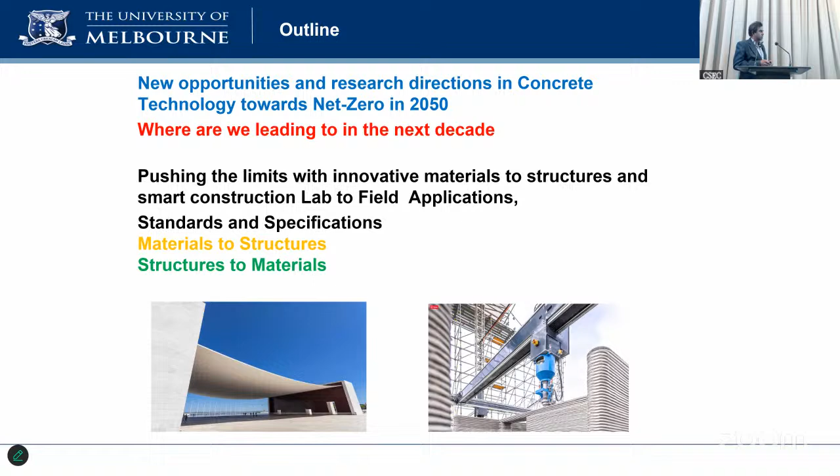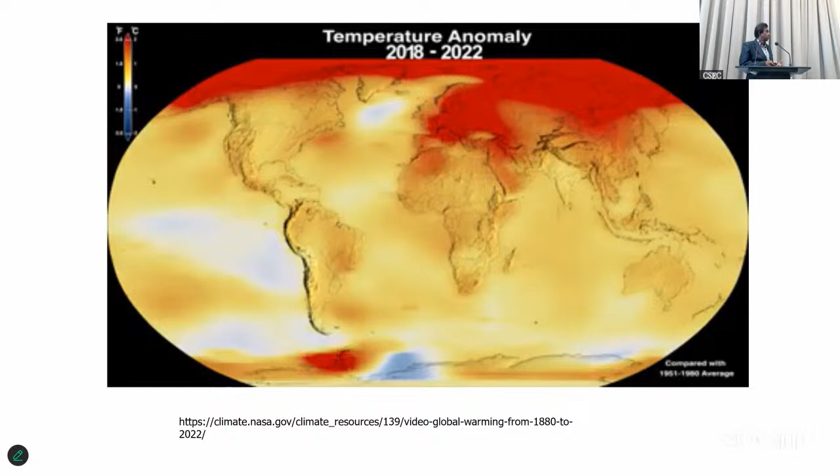So net zero concrete to start with, why we are doing that. The construction industry uses about 1/3 of the emissions of the world, and half of those come from two materials, steel and concrete. We use 0.5 ton of cement per year for every person alive in the world. I don't know how many people know that we are using half a ton of cement each. So when you look at the numbers, it's a huge consumption of cement and concrete.

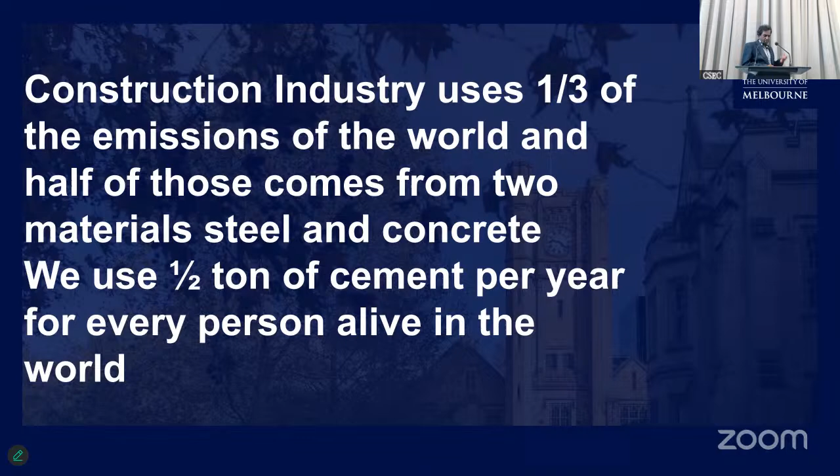Probably that's why we all are here in concrete, maybe one of the reasons. Because it is the second most popular material after water. So how can we reduce or remove carbon emissions? We really need to do this. So there are a few options we have.

We can use less cement. Today I'm not going to talk too much about optimization of structural elements. We can optimize the section. That's why a company like CSEC is always doing optimization of the structural elements, to get the best out of the materials. So really we can reduce the sizes, we can do all sorts of things there. Then increasing the recycling rate.

Again, recycled concrete is key: we demolish the concrete and then we can reuse the material. Once you demolish the concrete, we can really go and reuse the materials. So that's the second one. And the third one is geopolymers. I'll just touch on geopolymers.

Geopolymer concrete came so many years back. However, it took so long, about 20 years. Maybe I'll mention that when I talk about geopolymer very briefly today. I have limited time, but in the discussion there could be other questions. The fourth one is reducing the clinker content in concrete by using supplementary cementitious materials.

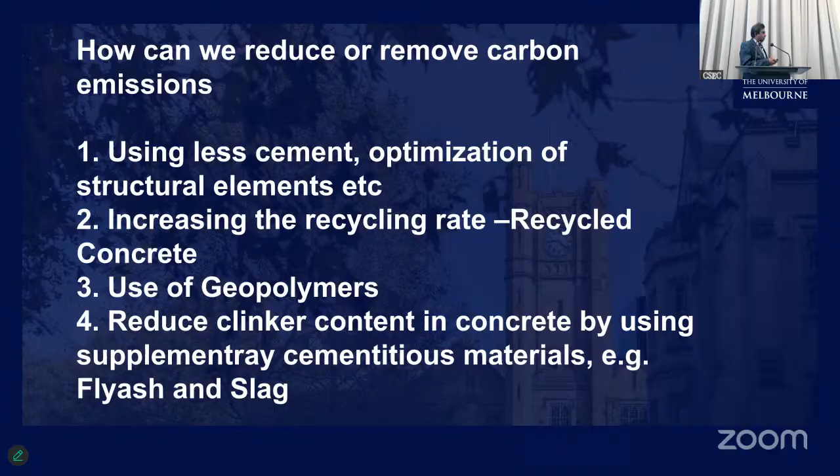I'll explain that. To get to net zero concrete: we already have got low carbon concrete, but to get to net zero concrete we have a long way to go. So as engineers and those involved in the industry, we need not be just engineers. We need to be part of the whole net zero system. That is why we are all here today, to listen to me.

We start with the basics. This is what I used so many years back to teach students. I still do a couple of lectures on concrete technology at the beginning. As a senior person, I still like to do that.

I don't teach the whole course now, but if you go back to the basics, we need to get to net zero. The only way is we need to get back to the basics.

So the concrete volume, the 70% filler, these are rough numbers. This can change, but it's very important that you have a feel for the numbers. The concrete volume is 70% filler and 30% paste.

So what we do is, only 10% of the concrete consists of Portland cement, about 20% is water, and then to reduce the cost, we fill with aggregates and all that. So it's like a glue, paste is like a glue.

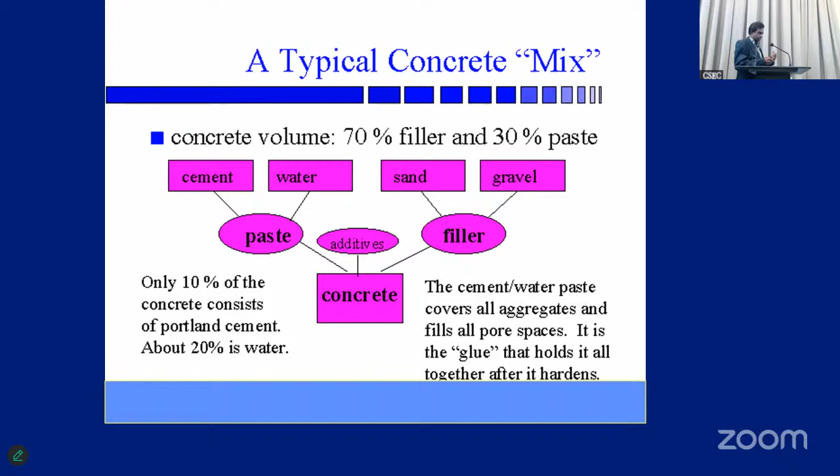So this is going back to the fundamentals. To really have proper designing of mixes and many other things, we need to really get back to the fundamentals. Then comes the cement paste, then we have the superplasticizers.

I think there are superplasticizer companies here representing the companies.

There are superplasticizers. We made a change to the world of concrete, where we could go down on water, reduce the water-cement ratio, and have the superplasticizers to improve the workability. So that's a key area that happened in the world, the invention of superplasticizers.

The concrete invention happened a couple of centuries back, but in the last century, one of the best inventions was the superplasticizers to improve workability. It's a growing area, and I can talk for hours on superplasticizers, but I will not do that today.

And then silica fume, and then the other pozzolanic admixtures came to the world with waste materials being converted. We didn't know what was silica fume or fly ash. I've been in the industry for so long, I know the beginnings of the fly ashes.

I have to mention the whole world has thanked Professor Malhotra, who brought fly ash to the world through evidence-based work from Canada, CanMet. As a young academic, I had a chance to go to Canada CanMet conferences and met Professor Malhotra.

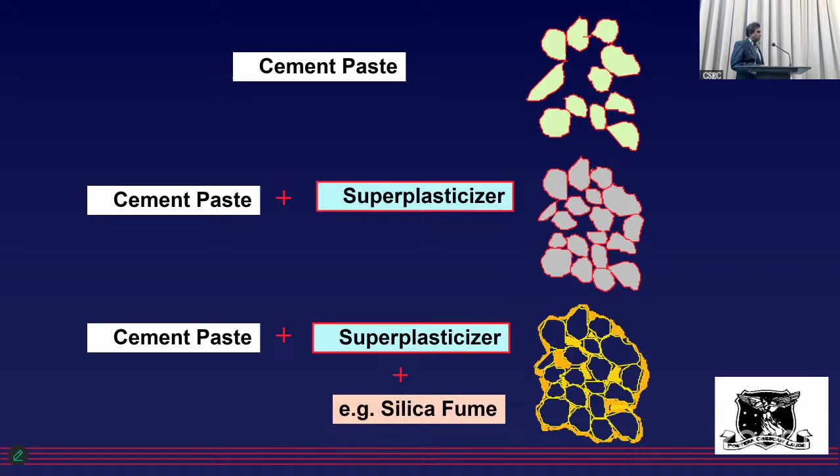So coming back, this is a graph that I use, and getting back to the fundamentals, that's where we are. We have to really get to net zero. We can't just touch on what is happening in practice. So on the y-axis, for the young engineers here and others in the construction industry, this is where we should start.

The surface area is on the y-axis and particle size on the x-axis, showing the evolution of concrete. We started with large particle sizes on the right, then coming to the left, natural sands, Portland cements, fines, and then fly ashes came later. The particle sizes were lower, but we were increasing the specific area, the particles becoming smaller and smaller.

Then you see the performance improves, and we get to conventional concrete on the right, and high strength, high performance concrete came to the world, and some of us were there from the beginning of that journey.

So coming to silica fumes, metakaolin meaning clay, which I'll have a few slides on later, and then the nano-engineered concrete, where we have nanosilicas and all that.

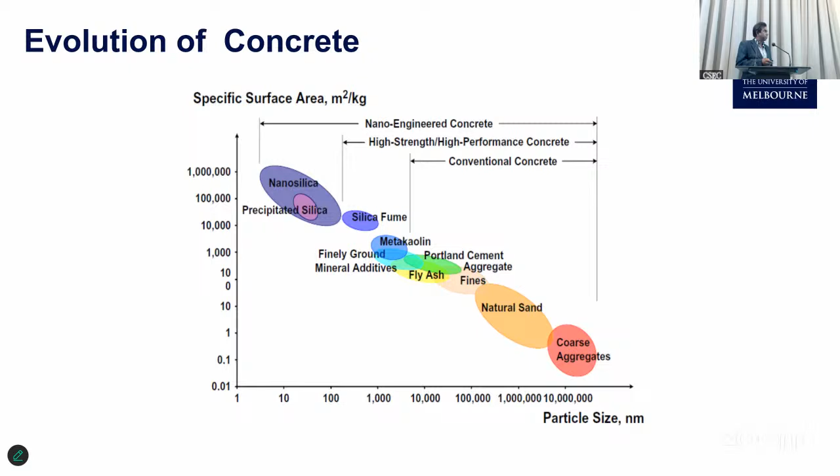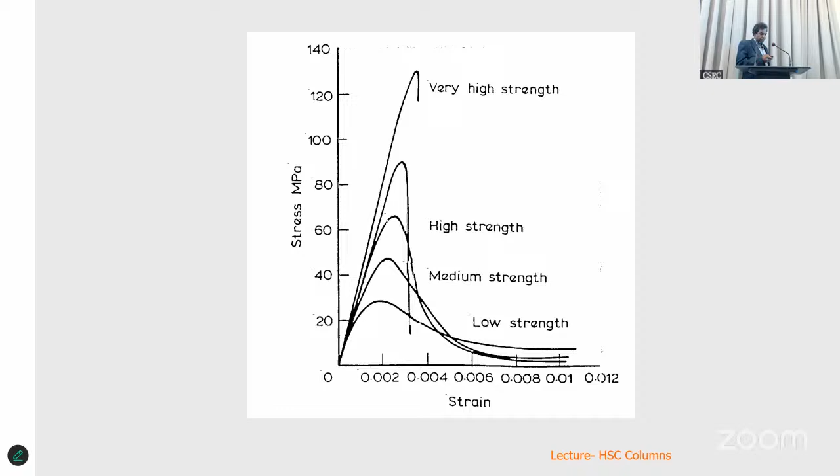That one is for another day, that talk. I will not go into it unless there's questions on the discussion. They're all here if you want. I think this book I wrote in the early 2000s, so it's all in there.

So we need to look at, I'll talk about the materials side more. Today the talk is more on the technology and the materials, but so it's the high performance materials for the future. And so we need to look at the performance side.

We need to start from the performance. It's in the lightweight. And I know, Mr. Tilak, your module had to be lightweight, the high strength, get into the high strength. The fire resistance is a key.

So we can do whatever with the materials. And actually, Sri Lanka's expert in fire resistance is here, Mr. Vajra, Aero Solutions. They're doing lots of work on trying to protect the structures from fire.

The high strength, durability is a key where the durability has to be looked at. The affordability, and it has to be affordable.

We can't just go and do everything just because we want to get net zero concrete. We can't spend millions and millions. Then it's not going to go to the actual structure. So we need to be affordable, environmental friendly. That's what we are doing now.

So you need to look at the performance overall when you look at the material as well. Acoustics and all that are secondary, but very important. Sound barriers and all that are so important.

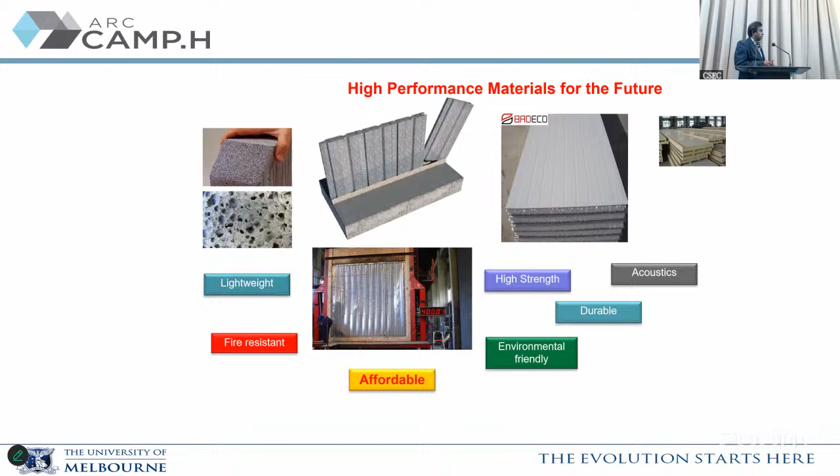So what we had to do is really use the zero carbon or low carbon materials. And we need to really get into the practices. Only way is the evidence-based field applications. We need to look at the field and collect the evidence now. So we have to start working on putting something here.

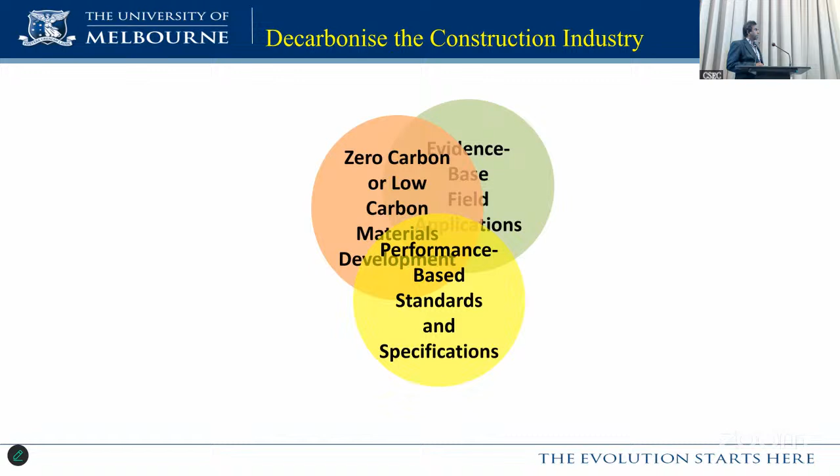And again, to really reduce to the critical period, let's not worry too much about everything there, but look at, we need to get to net zero in 2050. So we are already in 2025, and I think we have only 25 years. And even by 2030, we thought we should get somewhere.

But I will not touch on the UN SDGs and all that today, but we are really behind. And even 1.5 degrees is not going to happen. We are going to have at least 2 degrees in 2050. So we are behind on everything. So that's why we need to get solutions very quickly. So it's a critical period for change.

I think I need to put that arrow now a bit more further. I don't think we'll achieve that by 2035. This one I think was done in 2020. So we said we have 15 years of critical time, but not much has happened in the last 5 years actually.

When you think of yes and no, people are doing a lot of work, but in terms of progressing totally to net zero, we should have had net zero concrete by now in a big way. We don't have that yet. So we have to really keep working.

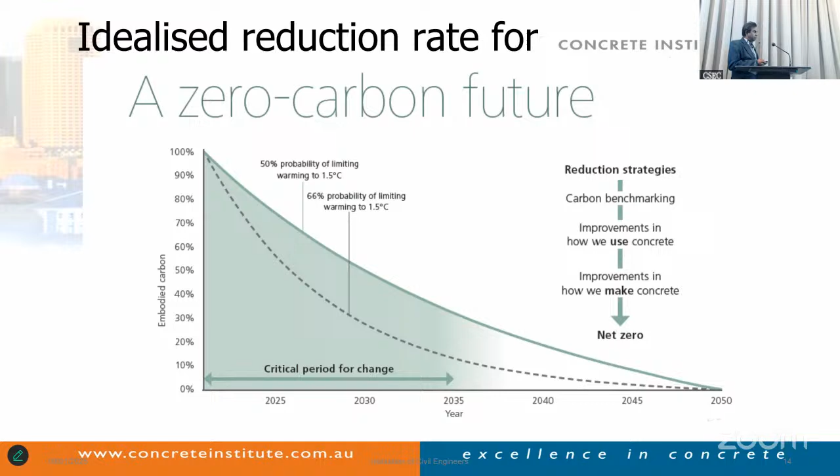So this really, no need to read too much, just to show that after water, concrete is the most consumed substance in the world. It produces 3 billion tons of emissions. And concrete itself, huge number, 8% or more from concrete itself. So 1 ton of cement emits 1 ton of CO2.

And then concrete is 0.9. Now, we need to know these numbers. Finally, it will be a numbers game in the future.

Right now we assess any project only through cost. But in the future, it's already happening in countries - Australia is happening, and Singapore is going to go even further. Europe has always been doing this - you need to show the carbon numbers for a project. We can't just say the cost is this for a project, so we need to inform. That's what we're doing here too, informing carbon numbers.

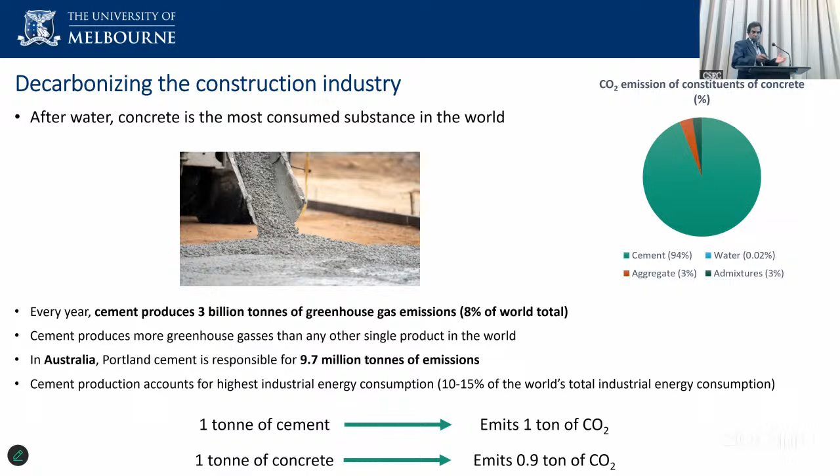So just for those who don't know why concrete is the problem - some of you may know this already, but this is the problem.

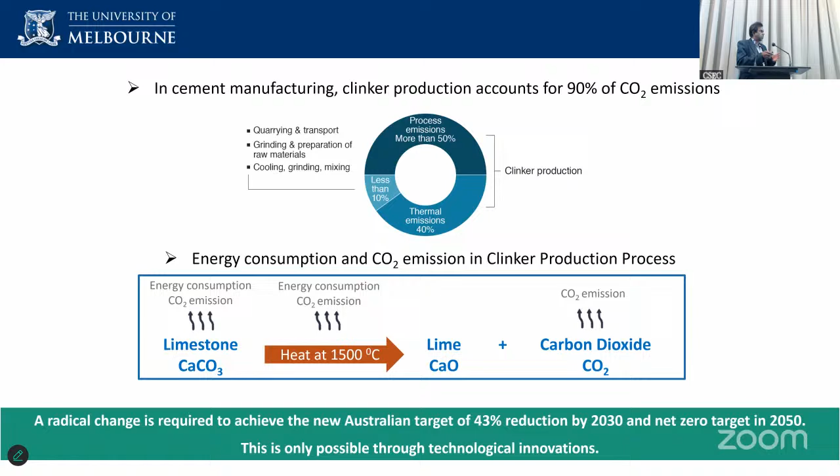We have limestone - I'll show you the next slide. In the actual process, limestone, calcium carbonate, is used for cement production. It's heated to about 1500 degrees to convert it to lime, which is the key ingredient of concrete. Carbon dioxide emissions come from that process. So we really need to do something and attack at that level - we need to do something about that. This is a basic diagram of cement manufacturing.

In cement manufacturing, clay and limestone are mixed - calcium carbonate - and it goes through a raw mill, then through a rotary kiln, and you get what's called clinker. In the rotary kiln it's heated first to 900 and then to 1500 degrees, and that's where all the carbon dioxide is released. So we need to attack at that level to really do something. Gypsum is added, and other chemicals are produced - it's really a combination like this.

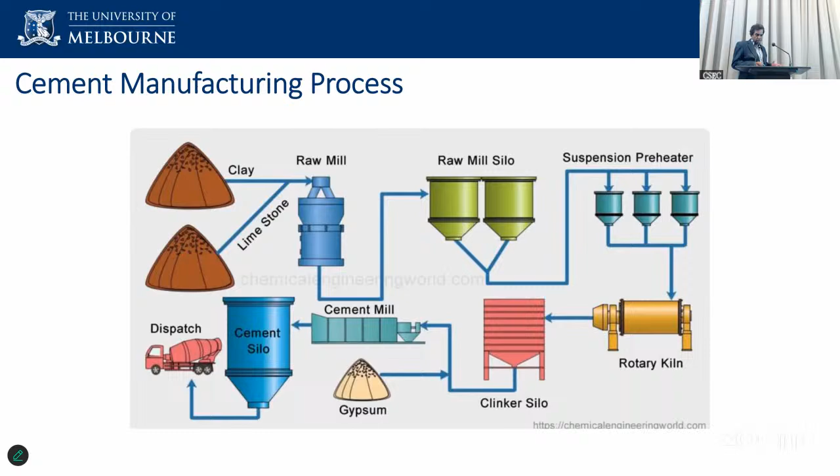So that's calcination. Now what's happening in the world? It's just starting to happen - even companies are now in the process. I told you calcium carbonate is involved, but carbon dioxide is captured - the carbon dioxide is captured, and the first process is capturing it like that.

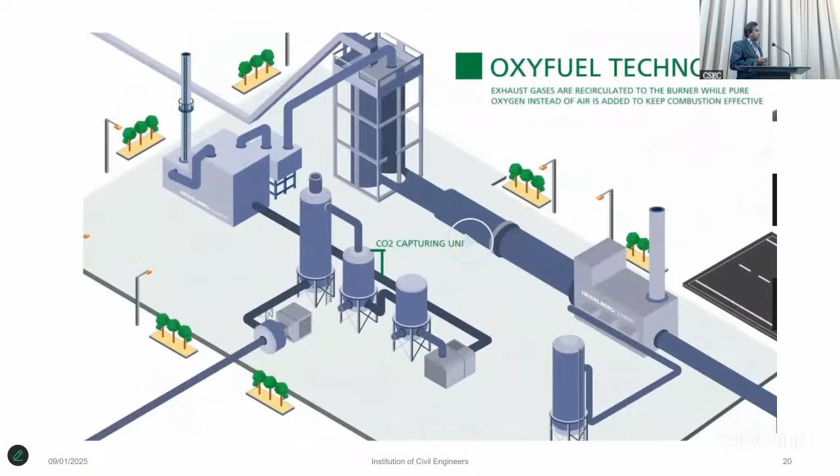So coming back to that - the low carbon concrete. I'm not going to talk about theory so much, I'm happy to answer questions and communicate about the technology, going deeper into this. This is what our team specializes in here. From low carbon concrete, the next step is zero carbon concrete - we have to be really definite and clear about this.

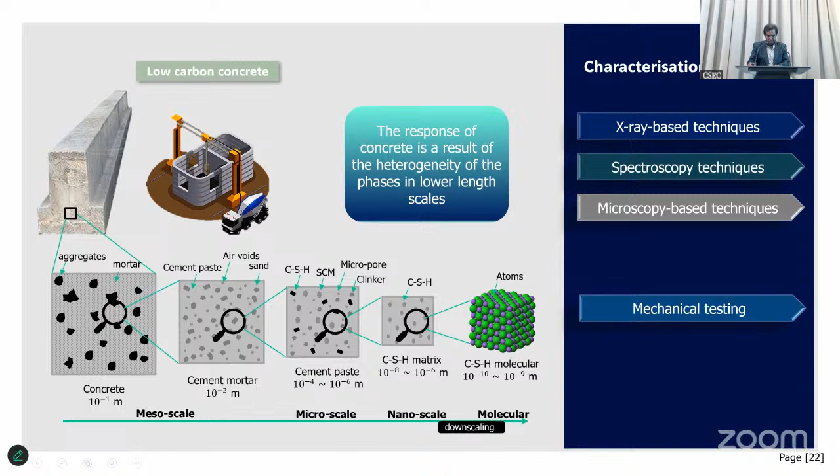First of all, there are a lot of experts in this area, like characterization technique. We're also saying this is something no other place in the world can do - using good technology and structural expertise to the best. So that's the term I can use for this very short problem. There are very good technology groups in the world, and very good structural groups, but I don't think that's enough - there are experts on both sides.

On the right-hand side, you see characterization is quite important - X-ray-based testing, and there are other ways of doing it, like microscope-based technique, EDS. We work from the nano level - we have the nano scale, micro scale, and each scale then gets visible.

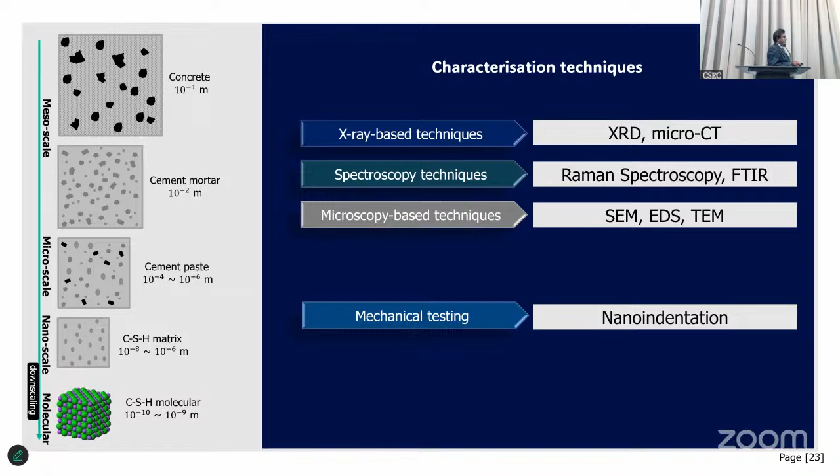Yeah, sure, that's fine. So then again, what we're doing is characterization. We do the material and we link it to the structural with what is called a new technique, nano indentation. I think Anuradha is here, one of my best PhD students, who has completed. I'm sure she's listening today. So she's working from materials to the structural level with the nano indentation. So we have done some world-class work with that.

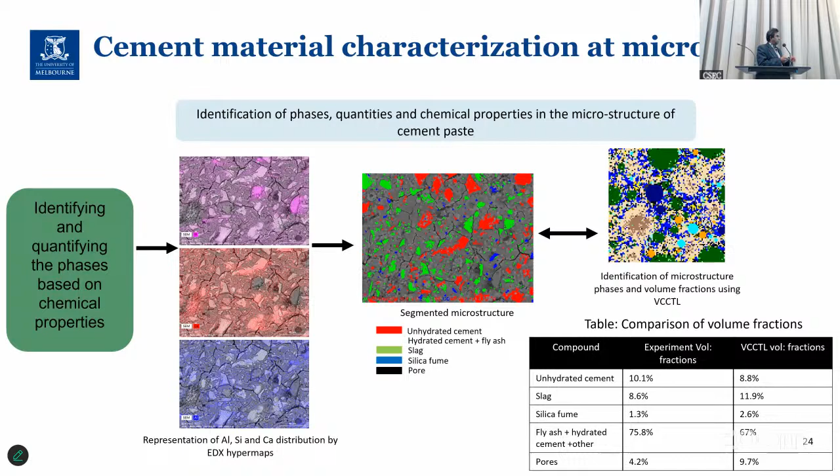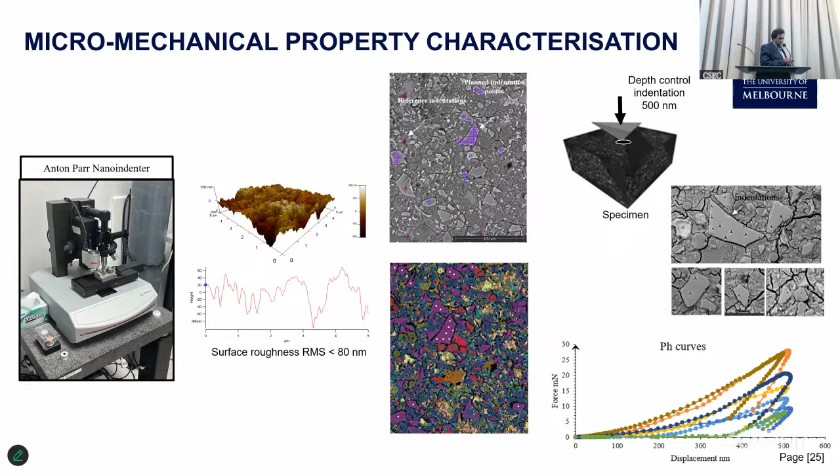So in nano indentation, the final graph is force versus displacement. It's all about force versus displacement. When I give structural analysis lectures, I say that is what we want to achieve for a structure, force versus displacement. Then we can do all sorts of other things. So here we are converting the materials to the structures. This is the most difficult task. We're looking at the material characterization and converting it into the displacement on the structural level.

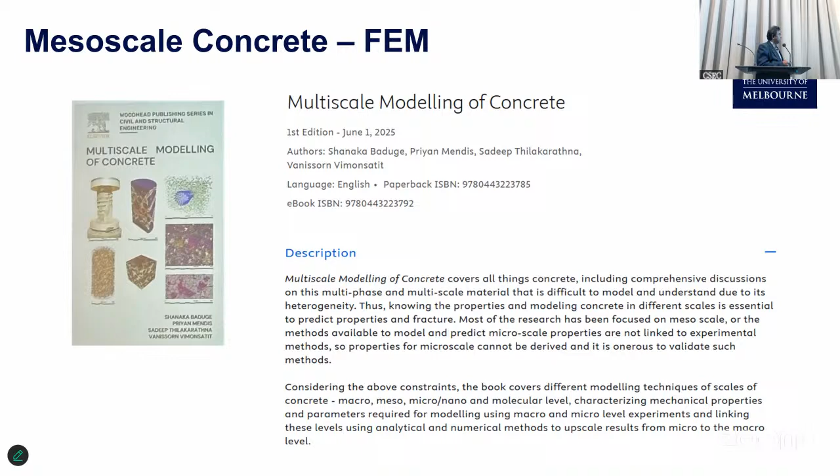Coming very briefly to geopolymer concretes. Again I will not touch too much. This is really for the younger group. What is geopolymer concrete? With the solids, you have what are called the precursors. You can have any material which has aluminium and silicon, with clay, slag, all sorts of material, rice husk ash, silica fume, fly ash, any of these materials, and then we add some alkalis.

You can read about geopolymer concrete later on if you are not familiar, but the alkali activation is the key. Use the alkalis to activate this material. Sodium hydroxide or sodium silicate are the ones being used, and then you get the alkali solution. Again, at the world level, what's going on now is to really have natural activators. We are going natural for everything, right? The chemicals being replaced by natural materials. And it has to be done very slowly; we can't do it straight away.

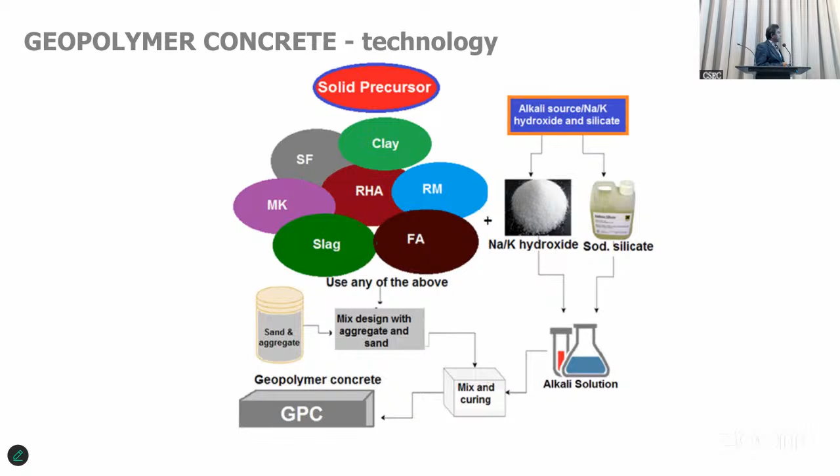I like to have some cement around, cement to be mixed. So even with geopolymer concrete, we go and say, let's have about 20% cement even. So I'll leave that to another time. So geopolymer concrete, cementless concrete, is again a zero carbon type of concrete, but we need to do other things for that. It's a basic one, but the only problem is that it's not accepted totally for structural concrete yet.

So what we did in Australia, and I was also part of that group, is we came up with TS199, which is for alkali activated materials, and geopolymer concrete is one of the main ones. And we recommended it for structures. So we may come to the structural level, but there are very few structures around the world on that. Anyway, I'll leave that to another time.

So we need to look at the properties first. The OPC, and this is the geopolymer concrete. This is a very good comparison, but this is not the direct comparison. You can work on OPC concrete and get to that side as well. At the same time, there are geopolymer concretes that are not as good as what is mentioned here. So we have to very carefully work on that before we totally replace the OPC.

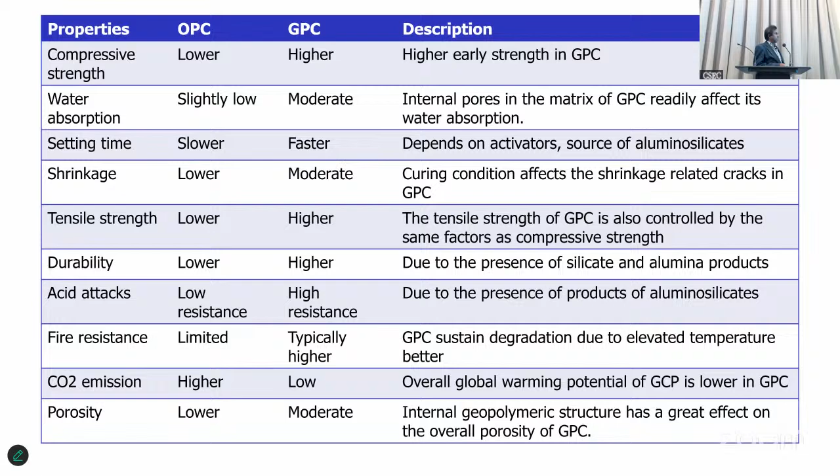So some of the applications are there. So I will leave that for now, and people are starting to apply it. But geopolymer concrete has been there since 1975 or whatever, till the 80s. But still we have not got geopolymer concrete. But we can't wait.

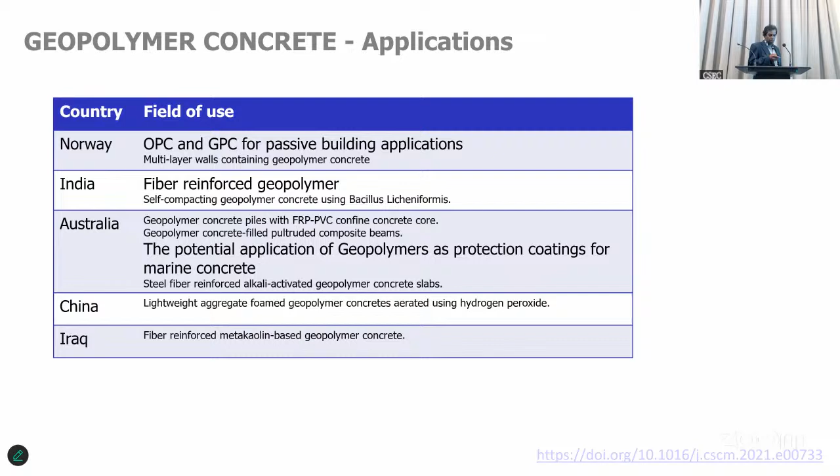Anyway, this is really briefly my talk on new things, so I'll just summarize. Again, I have to thank Anuradha for doing some slides for me from Melbourne.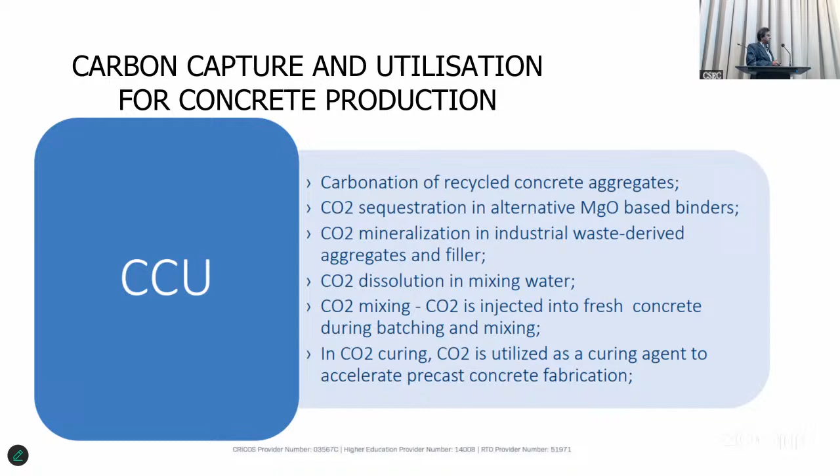So the recycled concrete aggregates, where we demolish the concrete. The recycled concrete aggregate concrete has two surfaces. One is the old surface, where around the aggregate you have the cement paste, and then once you make the concrete again, you have another surface. It's got two surfaces. So the outside surface is a bit weak.

If we go into a bit more depth on what carbon dioxide will do to this outside surface, when the carbon dioxide is injected, you see on the right hand side diagram, it comes back again with pressure, and sometimes you need some temperature to do that. And on the outside surface, the calcium oxide in the cement paste outside layer becomes calcium carbonate. So that process will absorb the carbon dioxide in the recycled concrete aggregates.

And I hope I'll be able to do that here as well one day. We are starting to do that in the labs, but it's not actually properly done anywhere in the world on a commercial scale. Maybe someone here listening today could start a business. I'm sure they'd earn a bit of money in the future.

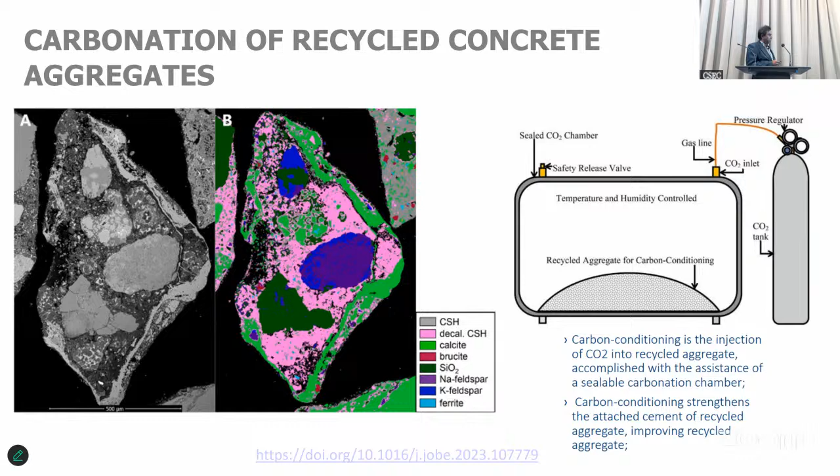I know there are a number of people here. We invited only a very small group because we have limited space, but thank you for being here. Some of the companies are here as well. But your support, I would call that, is quite important. That's very important to get the work done properly for these materials.

So this is something you will hear a lot more about over the next 5 to 10 years as well. My group started doing some of this work, but there could be other options as well. So in this case, magnesium oxide, I'll tell you the reason. We always go to basics, and the reactive magnesium oxide cement, why magnesium oxide is very important. Magnesium oxide based binders, I'll show it in the next slide.

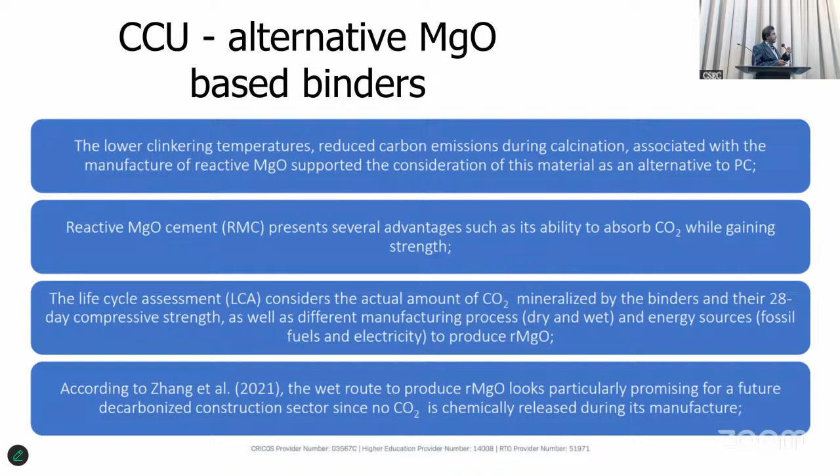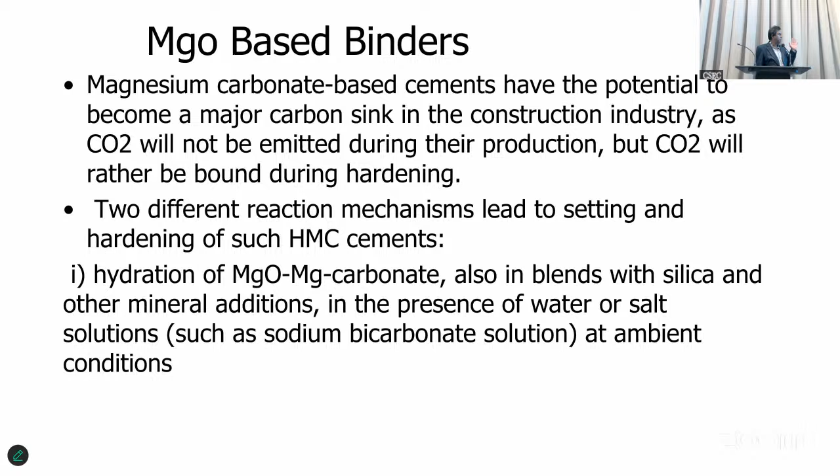This is very important. So, in this case, magnesium carbonate based cements, which are going to come to the world, have the potential to become a major carbon sink. There will be two different reaction mechanisms for setting and hardening of such cements. First, hydration of magnesium oxide and magnesium carbonate, also blending with silica and other mineral additions in the presence of water or salt solution at ambient temperature. So this is the main way of hardening.

And the second one is the carbonation hardening of magnesium oxide based systems at increased carbon dioxide partial pressure and at increased temperature. That will harden these magnesium oxide based systems as well. So the captured carbon dioxide from cement production can be used for these binders. And again, as I said, this will be more. So back to basics.

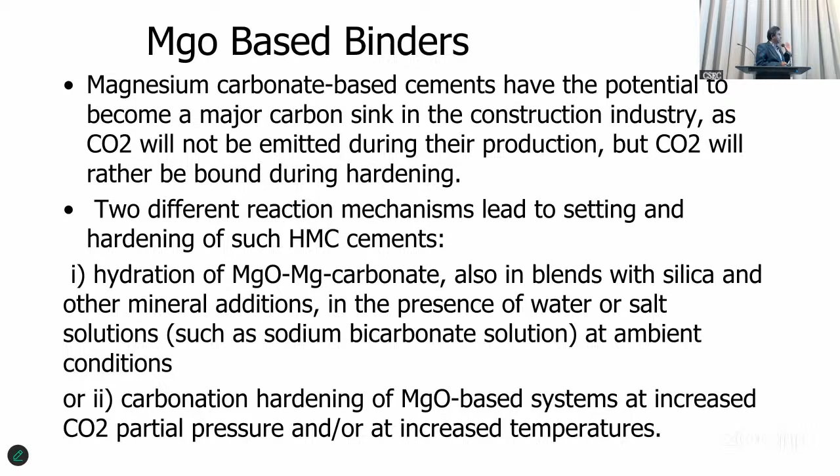I don't know how many people listening know the periodic table. I did chemistry first. We are civil engineers, but I do chemistry. And I still remember the periodic table. So to get to these levels, you need to go into the basics. I always tell my students, don't forget your chemistry.

See, magnesium and calcium, which is the main component of cement, are in the same group, the vertical column in the periodic table. If you want to go into detail, they have the same number of valence electrons and similar chemical properties. I think we don't spend enough time on this. You may be able to go down to the quantum level, but we don't need to.

So getting back to the basics, calcium oxide, that is a problem. Calcium carbonate emits CO2 to become calcium oxide. So let's do something with these ones having similar chemical properties. That's how magnesium comes in. And we could look at some other materials as well. So the periodic table is still so important when we work on cements.

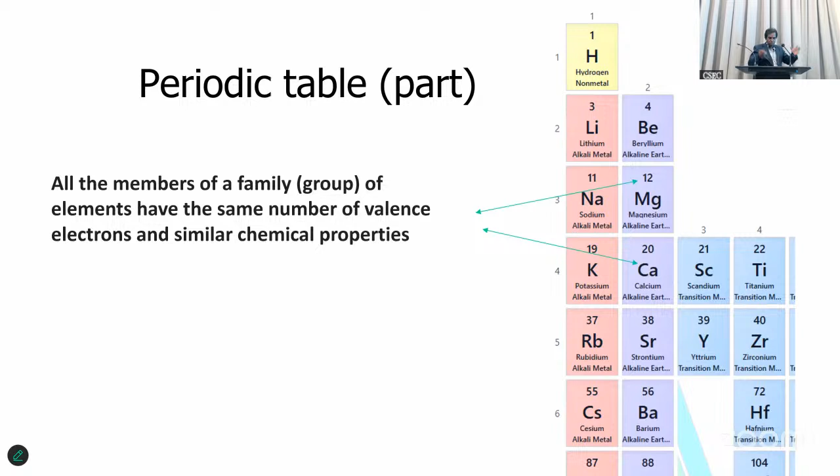So this is a summary of that, where I'll show you where the magnesium and silicon are coming from, and this can be dissolved. You don't need to heat it. When you heat to 1,500 degrees in cement production, you get that CO2. But in this case, it goes to the binders and the magnesium oxide is created, and the hardening process, as I mentioned, is with the CO2.

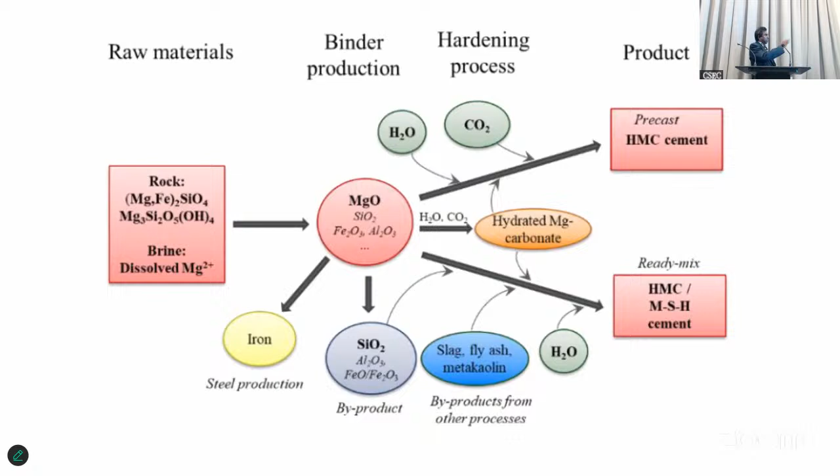That will really harden. Concrete is one of the best materials invented in the world because concrete hardens through the cement hydration reaction. So we are replacing that cement hydration reaction with some alternative way. We have to continue what we're doing, and at the same time get to negative carbon cement or zero carbon cement. So the other things I'll skip, just to show that it can be done.

That is carbon dioxide. We want to do something that captures carbon dioxide. So we can push it through fly ash. We can push it through slag. That really gets better material. And we already talked about carbon dioxide pushed through the recycled concrete aggregate. So that is how you get to net zero.

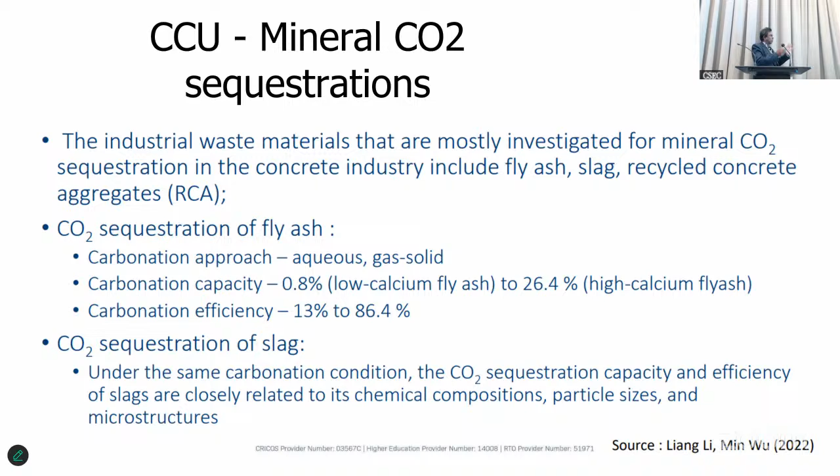You can read about the fly ash. I could spend time on that, but rather than that, it's very generally where the world is. So not to worry too much about detail. You will hear a bit more. It's 5 years on this work. So that is really what the sequestration is like.

You get to the accelerated carbonation treatment, as I said, with the carbonation, carbon dioxide through the materials, and then going around the loop, and the resource efficiency, and then final concrete elements and structures. So it's cost and energy efficiency as well.

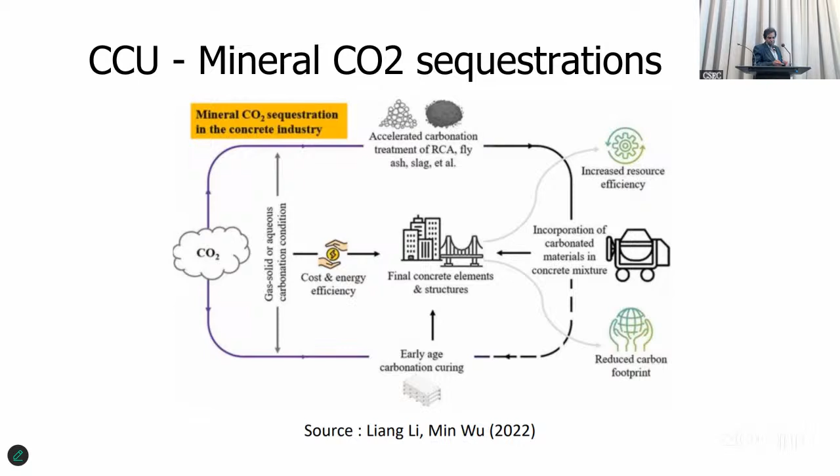So again, the carbonation curing can be done, carbon curing, to get to the zero carbon level. Certain things will become routine in 5 to 10 years, maybe 10 years, not 5 years. But this is something very special, close to me. There's a material called olivine, which comes from some volcanic rocks, and we have it in Australia, but there are other countries as well.

So olivine is magnesium ferrous silicon oxide. That's the chemical detail of it. It really absorbs carbon dioxide. So magnesium carbonate, again, just believe me, magnesium carbonate, and then you mix with some silicas. This work we are doing now, and then you get to the next level. So this is really a way of attracting the natural rocks available.

I in fact talked to someone in our geology department. She's done a PhD. She has a link to Sri Lanka. She's not from Sri Lanka, from Australia. Anyway, so I talked to her about the olivine from the geology side.

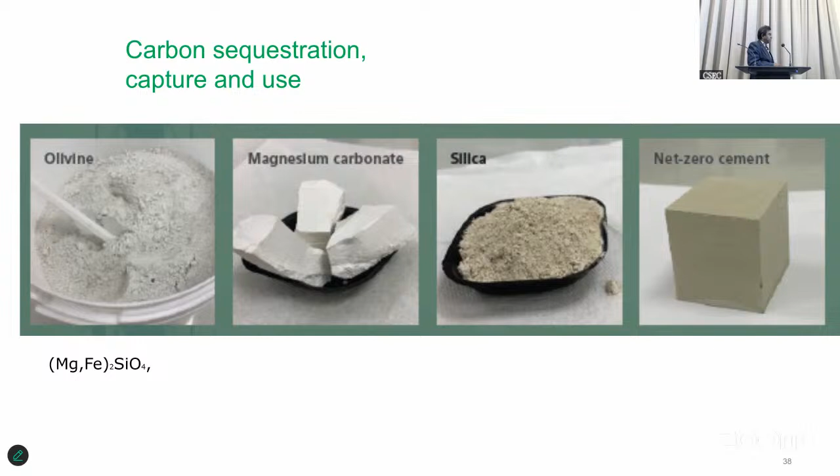But the magnesium carbonate with the silicas, and then you get to it again. And so this is one of the ways. You will hear a bit more from some of our work on that. So, the calcined clay cement.

So this is really something where I have to acknowledge Karen Scrivener from Lausanne. In fact, she's the first one to come up with calcined clay cement. So what we're doing there is with the OPC, the gypsum, the OPC clinker, essentially to reduce the clinker content, to really reduce the carbon. So with the fly ashes and other materials also, you can reduce it a bit more.

The blended cement. At that time, I remember I had a chance to launch it. I think Dr. Pichari invited me to launch the blended cement, invited me to be there. But the PPC, I think probably both of you came up with the PPC. Right? Yes.

So the fly ashes, I'm sure there are questions on fly ashes. Then the calcined clay, the limestone. In this case, calcined clay is just clay. I was saying the other day at a conference in Colombo, we have clay. We have clay around, and so calcined clay and limestone, you mix calcined clay.

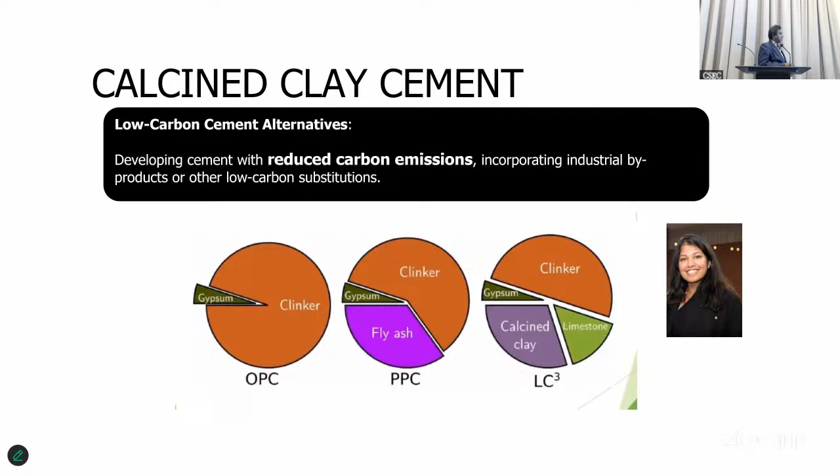So into the calcined clay cement with replacing. I think this one we will hear a lot more. Sandra's work we will see next year. We are working with a quarry in Melbourne, trying to have the calcined clay and really use that. It's not really in the practice yet, so we're trying to get to the real practice. This work, so LC3, you will hear a lot. I will not go into theory too much.

That's the work. But we work on looking at the temperature strength. We're getting the clay. This is just a waste clay, and some of the temperature strengths with these processes. But you need to calcine them with very high temperatures.

So here, why don't we see is the main question. Why don't we see calcined clay cements at industry scale? Lack of confidence to use new mixes. Most of the clays are not highly kaolinitic. I will not spend time today, another topic we can talk for some time. But the kaolin content is quite important. And the early age strength gain is slow.

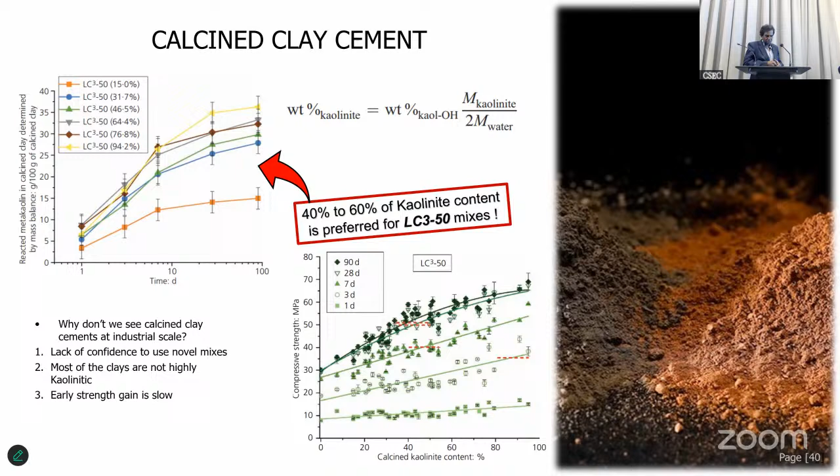So what we will be trying out in that project is maybe use some graphenes, graphene oxides, to give it more strength. So we can have some new materials, new things to do, play with some materials, trying to get to those numbers. So there are other ones being identified.

Again, I thank John Robert, to identify from his work with the materials some of the materials that we can use to replace, coming up with some pozzolanic materials to really replace not only sand, it could be replacing cement even.

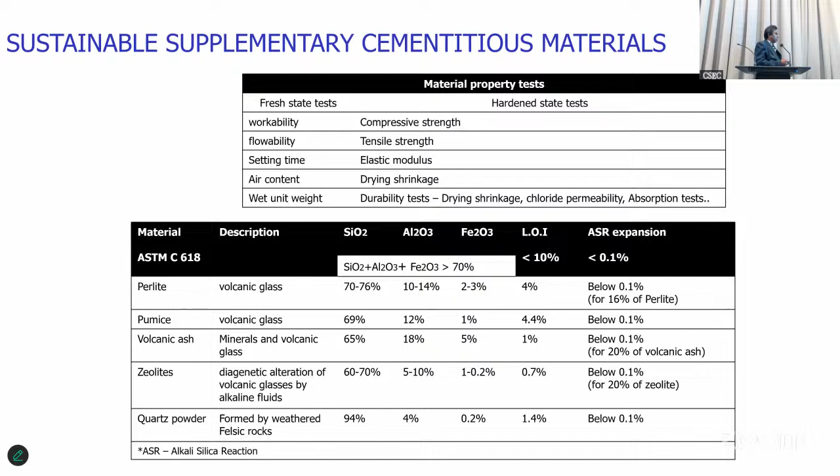We're talking about quartz. Sri Lanka has a lot of quartz. So much quartz can be used for concrete, because we have very pure quartz. I was told 99.8% purity, our quartz in Sri Lanka. So these are some of the things. So we can look at all that.

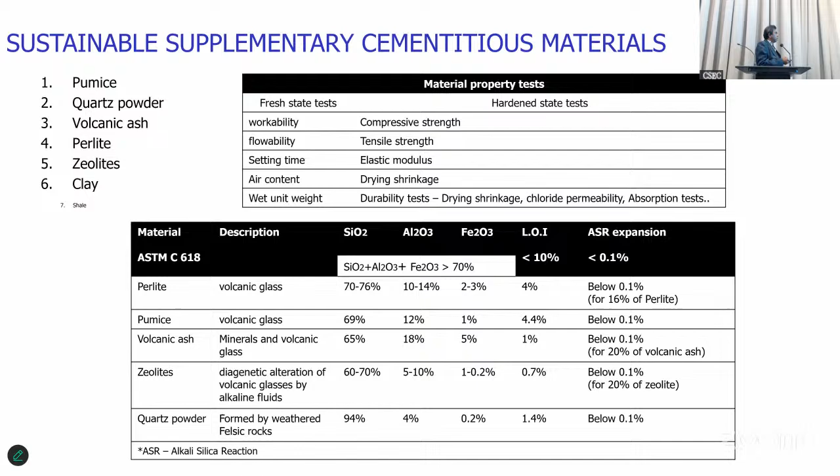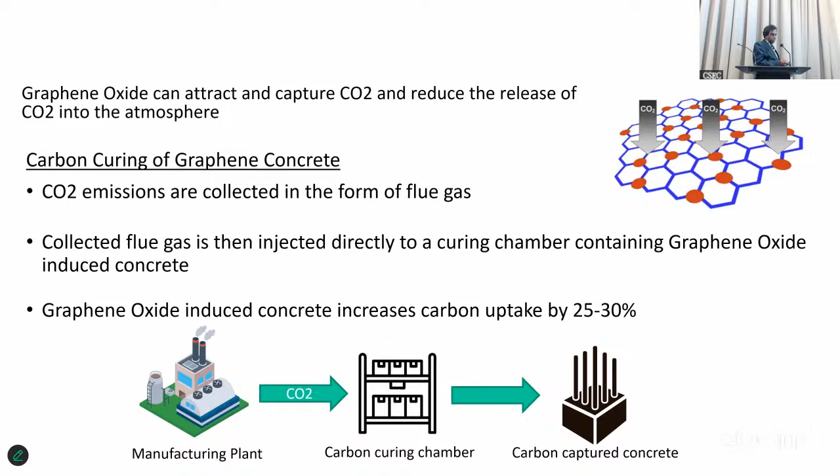This one is, again, we are doing some work. Today I'm not touching on graphene much. Again, Shara himself encouraged me to really understand that. It's really using graphene in concrete, because they're producing graphene now in Homagama. So we are using graphene oxide concrete. We think it will improve the carbon absorption. Actually, one of my students is looking at this graphene oxide and the carbon absorption. We're running out of time.

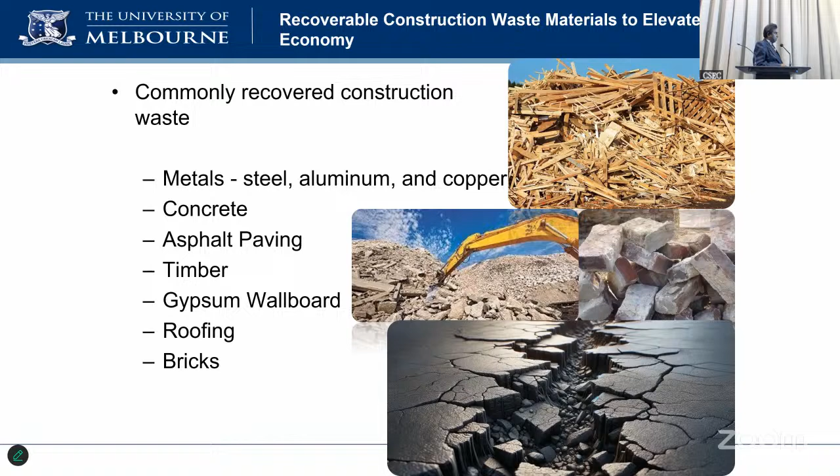But recycled materials in construction, we already talked about some of the recovered materials, the concretes, the timber, the gypsum, roofing, we talked about bricks already. So replacing with some of these recovered construction waste, to reuse them as construction material. Replacing with glass, paper, textiles, tires, solar panels.

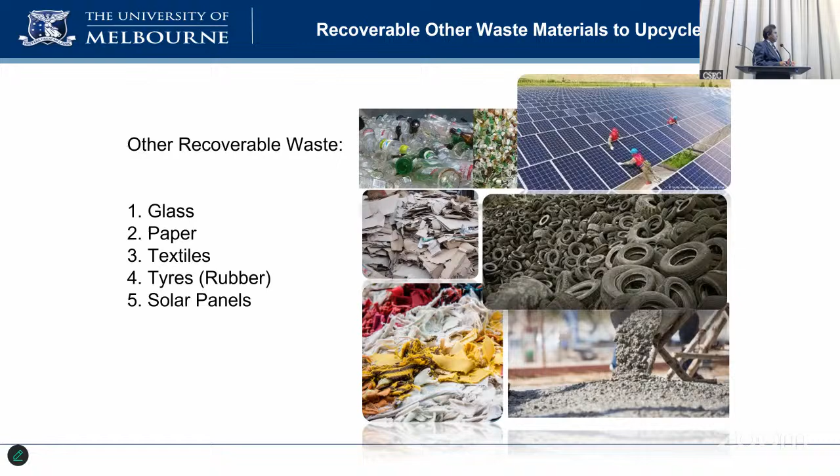I'll be very quick with this. But the graphene oxide, I will do another talk about this in detail, another webinar talk.

So plastics, rubber, crushed glass, bottom ash. Mr. Chomal has used it for the staircase here, total bottom ash. So that is not fly ash, but bottom ash. Fly ash is used a lot, but the bottom ash is really something that we need to try out a bit more. The recycled concrete aggregate, I think Mr. Vajira talked about it. But anyway, recycled concrete aggregate.

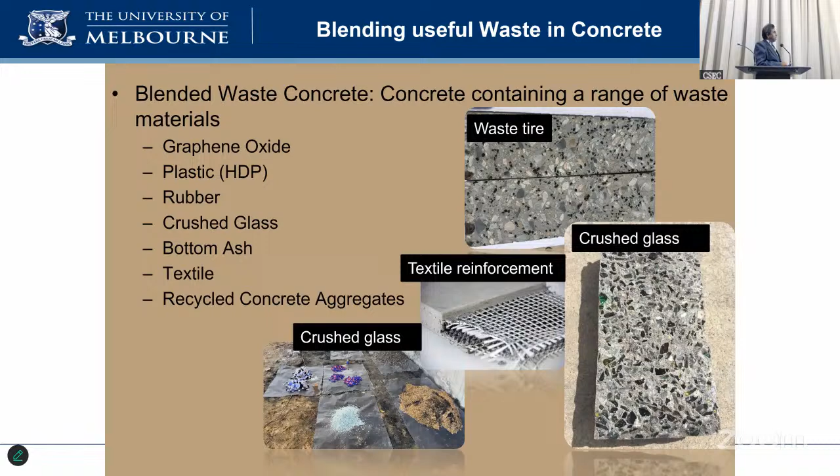So these are some real applications. This is where I'm proud of the group. Looking at glass, replacing the sand in this project. We got work with Holcim Australia to really have glass in concrete. So it's part of the net zero concrete. We can use other materials too.

So concrete is not just cement. We talked about cement before, but we replaced some of the sand, and we can't use natural sand all the time. We are running out of natural sand. So we are replacing; otherwise these just go to the landfill. This has got carbon numbers. To get to that net zero concrete, we can use all these techniques.

This is the first time glass concrete has been used in a large project. The problem here was - and that's why it's important - we don't see this in the lab: the glass hitting the pumps. So we had to adjust the mixers, adjust some superplasticizer sizes and workability, working with superplasticizer companies to come up with the right workability. So all these materials are important, not just one material.

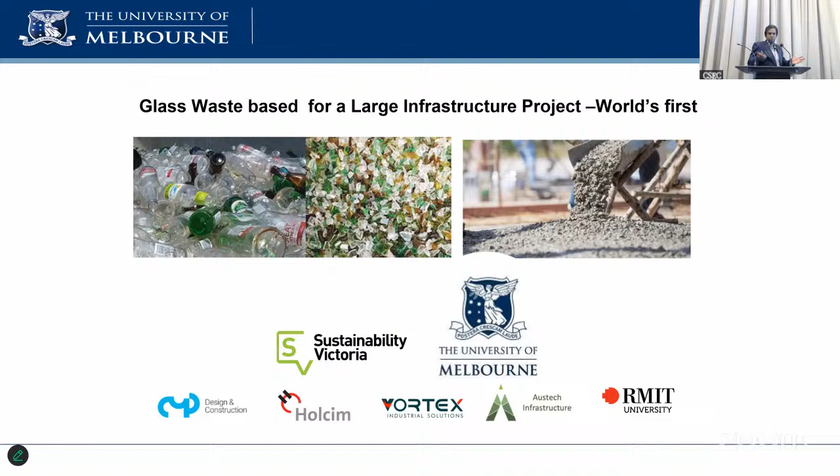That's one thing. Another is where we put solar glass, because when we replace solar panels, where does it go? Nowhere - I don't know where they're thrown, somewhere. They were being thrown to the landfill, but now we're not allowing that. So I have to thank Mr. Neeraj - he owns a company, set it up, invested about $6-7 million already on his plant crushing the solar panels, separating the polymers, the back panel, and the glass. That's a project I believe in as well, and though it's not fully finished, it's a very good outcome.

We can look at solar-crete, the solar glass concrete. Solar-crete is the name I gave it - it really picked up the name.

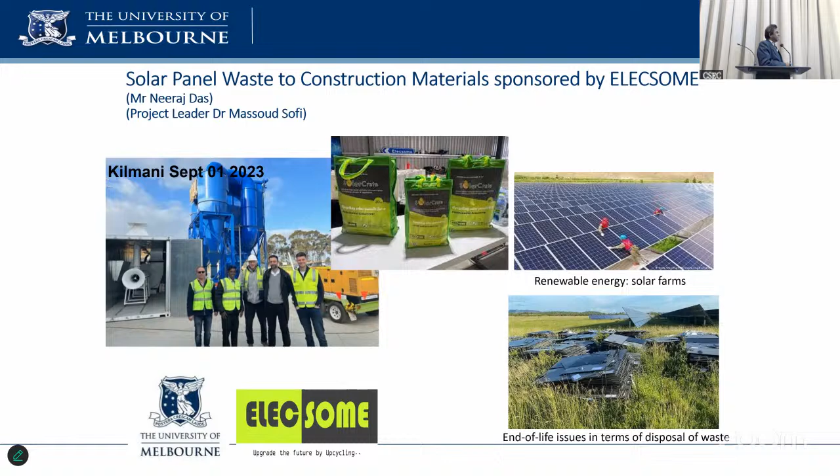We also have the plastics work done by Dr. Arnett, who is leading this net zero concrete project - I won't show the full video. To make concrete structures you use void formers. Normally these void formers are made from polystyrene or rigid foam. These rigid forms are going out of use because when they go to landfill they're really dirty and all that, so they're slowly being banned in at least one state.

We still have to use them in construction, of course - we can't do much about that - but here the robot is sorting out the plastics to be used for this. On the right hand side are the void formers on the slabs, and that's how the carbon footprint gets reduced. The robot is very slow in this case, and the video is sped up... I think the robot is done. This was all done by what happened to be a Sri Lankan team - one is a mechanical engineer, one is electrical, one is civil engineer, and another is computer science - so it's a multidisciplinary team. It's really good, the robot picking up nicely the different types of plastics.

These sort of techniques use AI integration. AI integration is key to getting this properly done - it picks things up properly, and this is now adaptive.

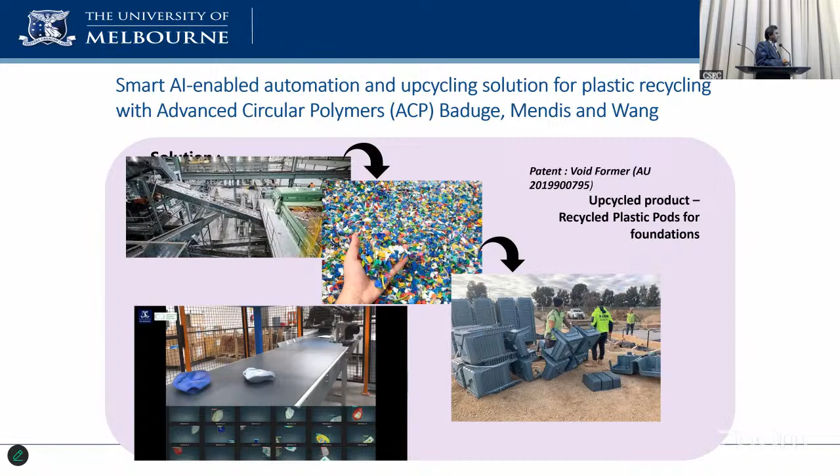I had to show you this place - this is one of the first in the world. This is the slab, this one here - when we're doing the slab we put everything into it. You are here in this lab, and underneath is all sorts of waste materials. Don't dismiss it because it's waste material - it's really a good application where we use all of that.

And we put graphene oxide in to really bump up the strength a little bit. So there are no cracks - no cracks at all. How many years is this one? Three years, must be - it's past the age where the first two years we'd normally see a problem. This part is the evidence base we have to create.

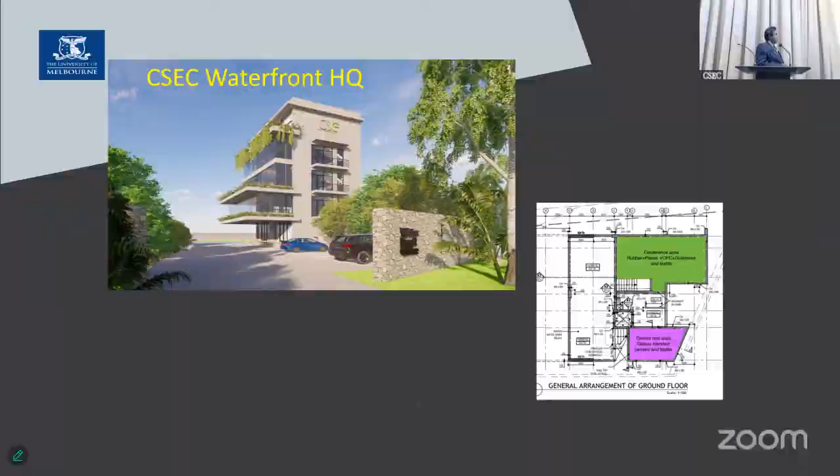We use this in a real area, and all of this is there. These are the materials we use for this lab: plastic, rubber, crushed glass, bottom ash, recycled concrete aggregate. And we found some textiles as well, and some hair - I don't know how we found it, but we put everything here.